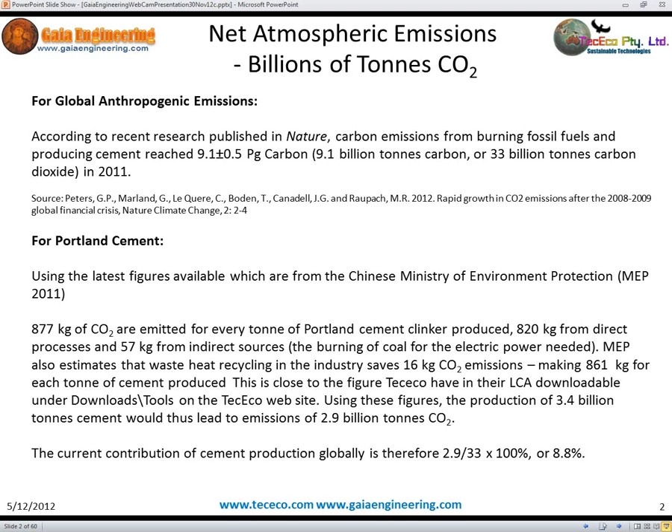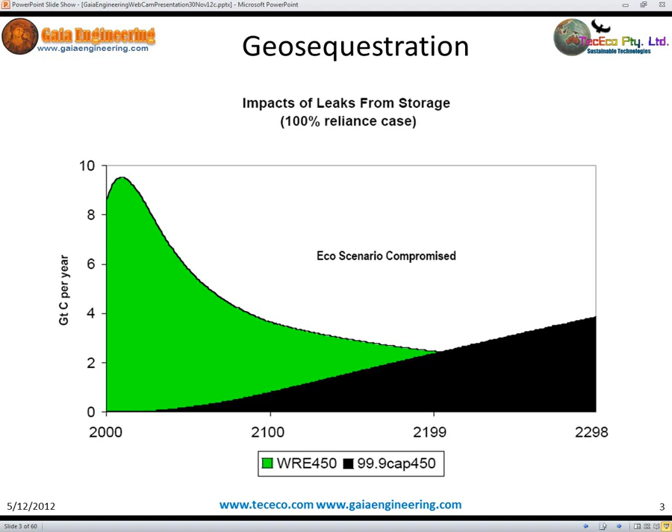Geosequestration is not going to solve the problem. There are legacy issues, and leakage will eventually catch up with it. It's downright dangerous. The Earth's crust is just not stable enough.

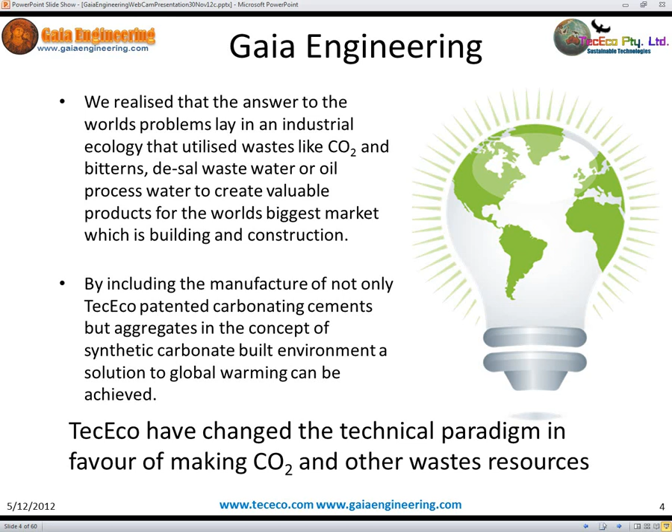I realised that the answer to the world's problems lay in an industrial ecology that utilized wastes like CO2 and bitterns, desal wastewater, or oil process water to create valuable products for the world's biggest market, which is building and construction. By including the manufacture of not only our patented carbonating cements, but aggregates in the concept of the synthetic built environment, a solution to global warming can be achieved. TecEco have changed the technical paradigm in favour of making CO2 and other waste resources.

I've been at this for a long time. In 2002, Fred Pearce, writing for New Scientist, said, "There is a way to make our city streets as green as the Amazon rainforest. All we need to do is change the way we make cement." Now, he was talking about our eco-cements, but since then I've realised that if we include synthetic carbonate aggregate and consider concrete as a whole, the sequestration potential is absolutely enormous.

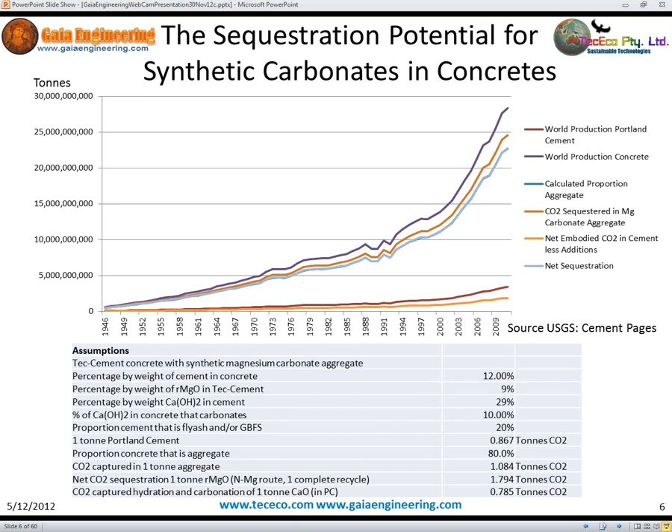Just look at the blue line on this graph. For 2011, the sequestration is potentially about 23 billion tonnes. That's about 2/3 of total anthropogenic emissions in that year.

In my opinion, a viable sequestration technology must be simple, scalable, have low upfront capital costs, low environmental impacts, produce saleable product with insatiable markets, and be easily implemented and deployable over a wide geographic area. It should also ideally be industrially symbiotic and address one or more other major problems facing the planet today.

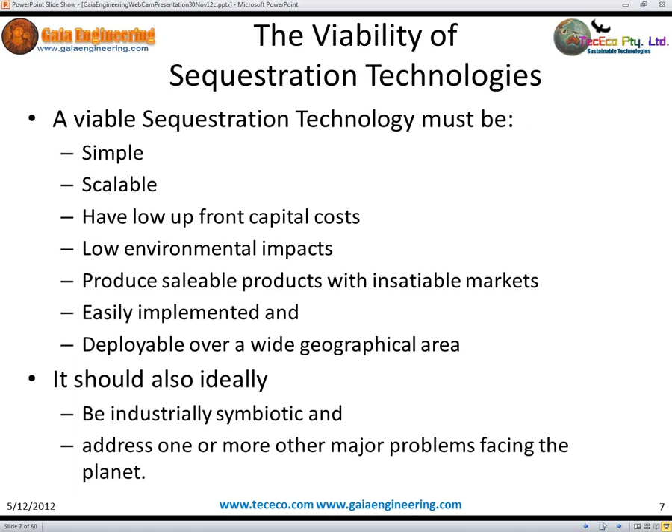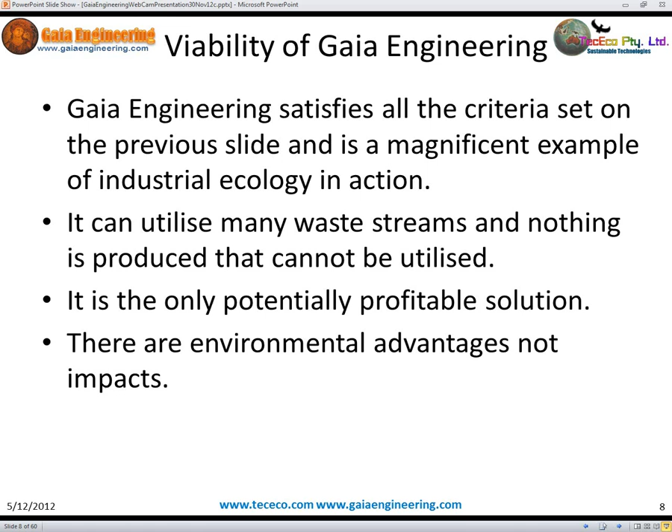Gaia Engineering satisfies all the criteria in the previous slide, and it is a magnificent example of industrial ecology in action. It can utilize many waste streams, and nothing is produced that cannot be utilized. It is the only potentially profitable solution. There are environmental advantages, not impacts. The process is scalable and can use intermittent energy from non-fossil fuel sources. It can add value using the energy available without having to store it.

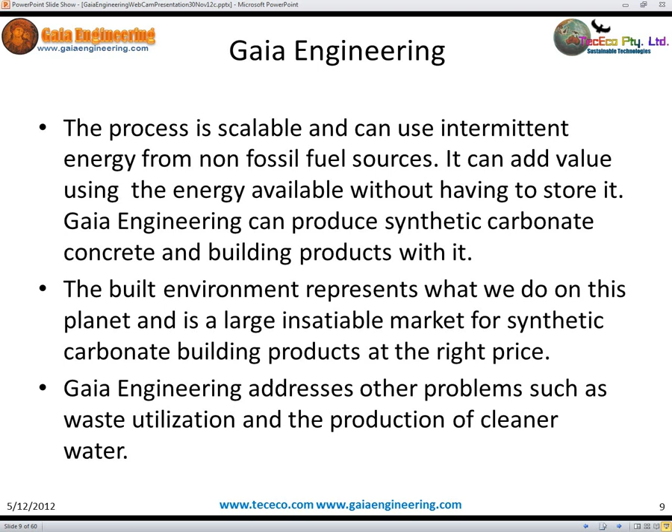Gaia Engineering can produce synthetic carbonate concrete and building products with it. The built environment represents what we do on this planet, and it is a large, insatiable market for synthetic carbonate building products at the right price. Gaia Engineering addresses other problems such as waste utilization and the production of cleaner water.

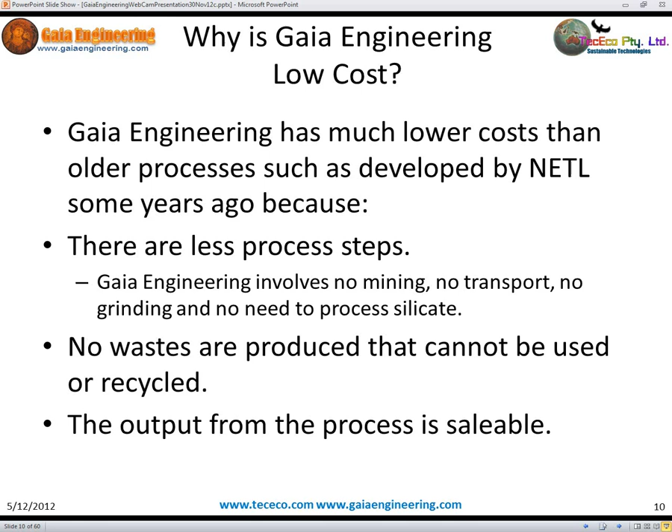Gaia Engineering has much lower costs than older processes, such as that developed by NETL some years ago, because there are fewer process steps. Gaia Engineering involves no mining, no transport, no grinding, and no need to process silicate. No wastes are produced that cannot be utilized or recycled. The output from the process is saleable.

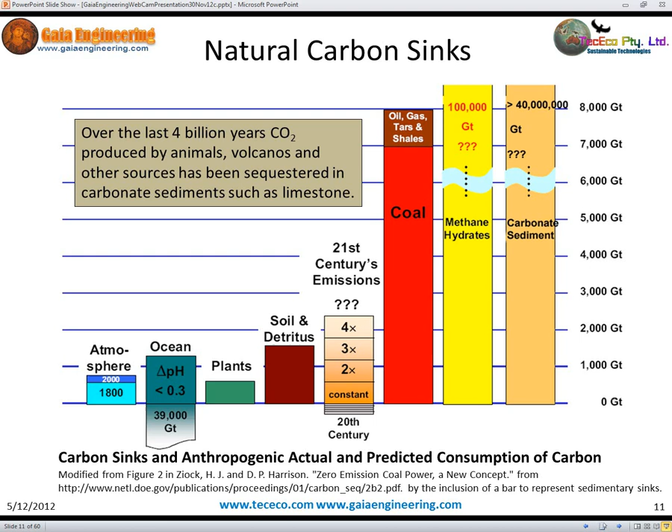Over the last 4 billion years, CO2 produced by animals, volcanoes, and other sources has been sequestered in carbonate sediments like limestone. Over 40 million gigatons. That's a lot. And it's permanent sequestration.

At 2.09% of the crust, magnesium is the 8th most abundant element. If we run out of desal wastewater and oil process water and other waste sources, we can always use seawater, because every litre contains 1.29 grams of magnesium.

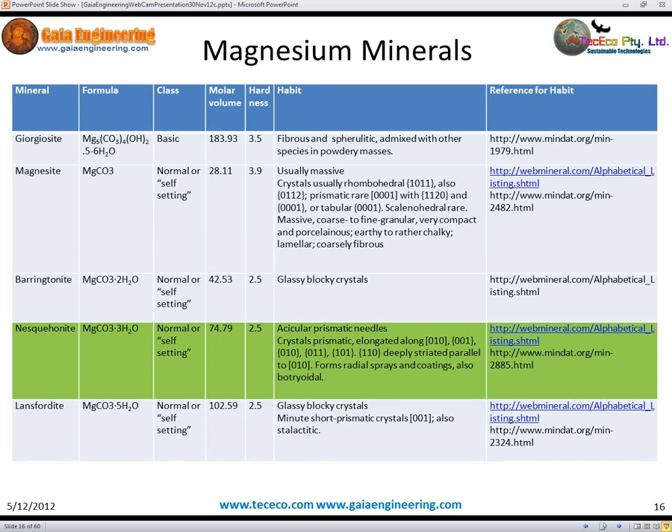There are a lot of hydrated magnesium carbonates to choose from. We're going to be utilising nesquehonite, and the reason is the microstructure. Nesquehonite has an ideal shape that contributes strength to a composite like concrete. It can be manufactured easily using our N-Mg sub-process at room temperature with little energy. It can be used directly in products such as acoustic panels, non-structural panels, insulation, etc.

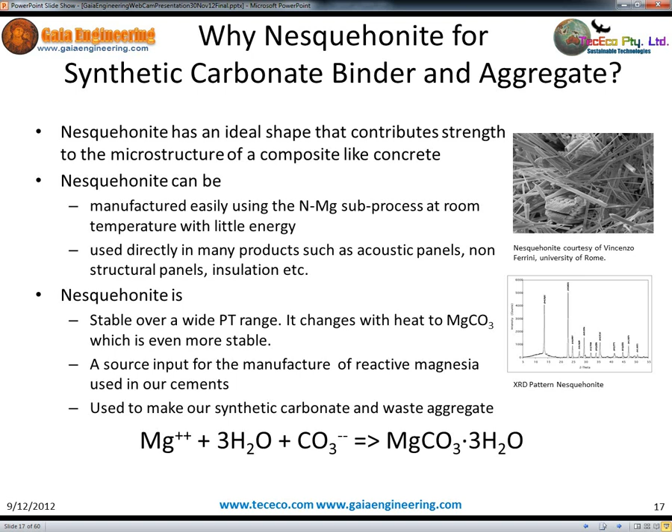Nesquehonite is stable over a wide PT range. It changes with heat to magnesite, which is even more stable. It's a source input for the manufacture of reactive magnesia used in our cements, and we also plan to use it to make our synthetic carbonate and waste aggregate.

Our colleagues at the University of Rome have a batch process for producing nesquehonite from brines. What we're doing at the moment is developing a continuous automated process. And we're also developing our Tec-Kiln, which is essential for making the magnesium oxide binder we plan to use.

There's a case for synthetic aggregate. Sand and stone aggregates are in short supply in some areas, and nesquehonite is an ideal mineral for the manufacture of reactive magnesium oxide, our binder, as well as synthetic carbonate.

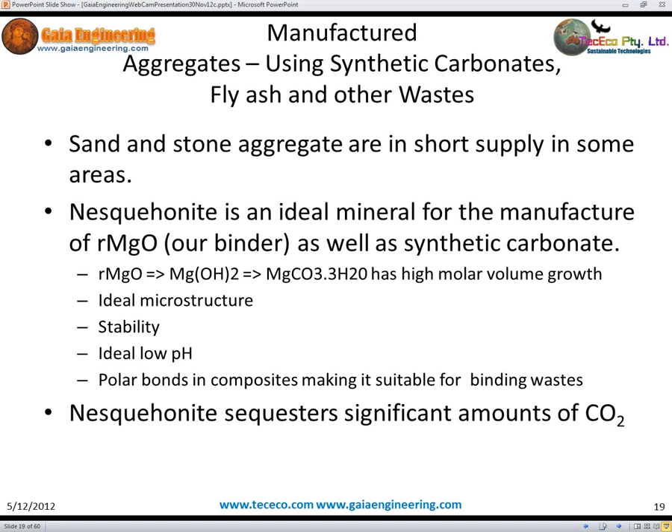Reactive magnesium oxide to magnesium hydroxide to magnesium carbonate has high molar volume growth, more for less. It has ideal microstructure. It's stable, low pH, and it creates polar bonds in composites, making it ideal for binding wastes. Most importantly, nesquehonite sequesters significant amounts of CO2.

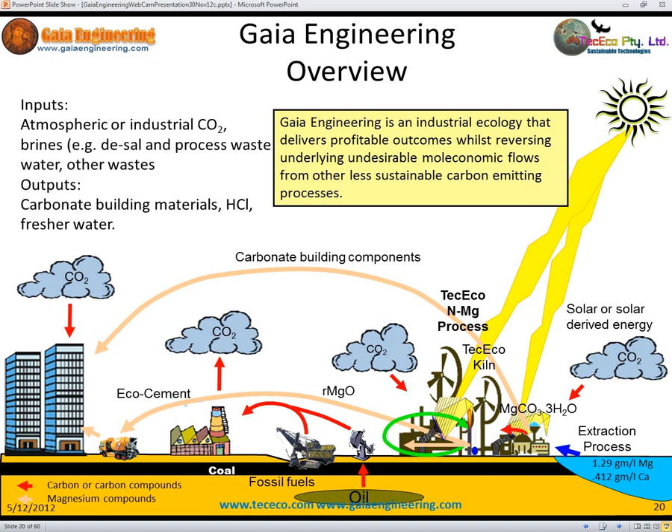This poster depicts the concept of the process. CO2 from the air combining with calcium and magnesium cations, producing the built environment. This flow diagram shows oil processed water, desal wastewater in our N-Mg process, producing magnesium carbonate for aggregate and other building components, and also as a feedstock to our kiln.

The reactive magnesia produced in the kiln makes our cements, along with a little Portland cement and perhaps some other wastes like fly ash and blast furnace slag. The process uses a considerable amount of industrial CO2.

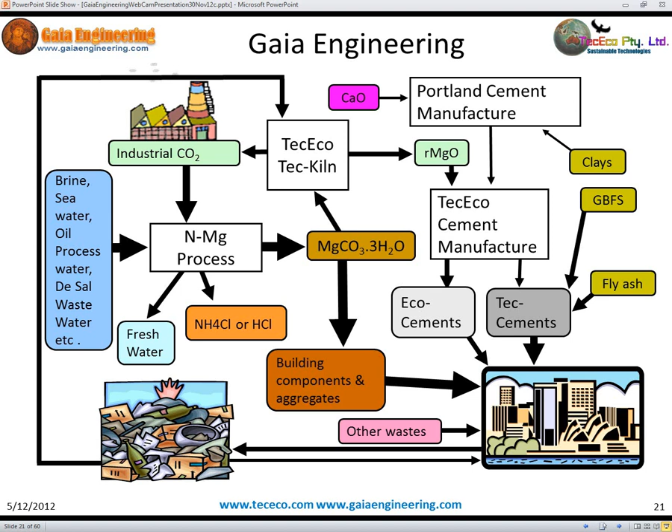The big picture is demonstrated in this vector diagram. There are sub-processes that can be included, like the Tec-Reactor process for sequestering even more CO2. There's a route to energy, but what we're going to be looking at in more detail is this circular industrial ecology here. The N-Mg process produces nesquehonite for our synthetic carbonate aggregates and other components. It's also a feedstock to our kiln to produce magnesium oxide used in our cements.

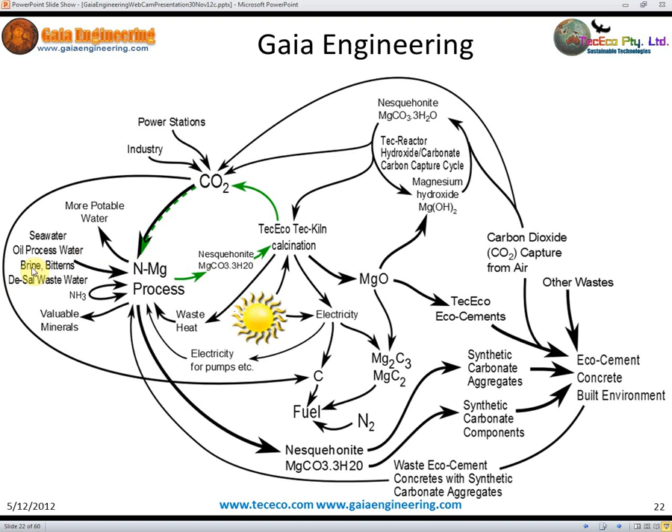The emissions, along with other point source emissions, go back into the process, combined with an alkali metal cation, in our case magnesium, to produce more nesquehonite. Consider the thermodynamic cycles involved. At the moment, our eco-cements cannot be made with capture, and so even though they sequester the chemical release during manufacture, there are some emissions associated with the process energies.

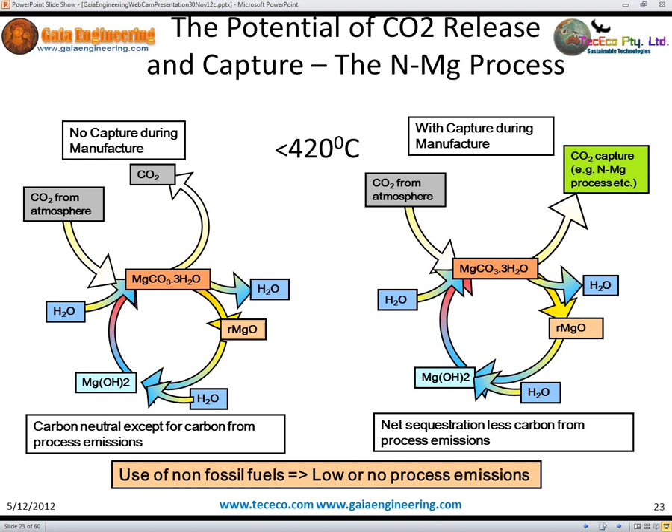The N-Mg process has capture during manufacture. It uses a man-made nesquehonite input in which there's capture, and there's capture during setting. That's 3 stages of capture. The sequestration potential is enormous. It's shown in this diagram. Stage 1, the N-Mg process. Stage 2, the TecEco kiln, calcination. Stage 3, our eco-cements bonding together synthetic carbonate aggregates to create carbonate concrete.

In stage 1, the production of nesquehonite, the sequestration is 1.084 kilograms of CO2 per kilogram of nesquehonite produced. The kiln has net emissions of 0.382 kilograms of CO2 per kilogram of magnesium oxide produced, and in the reabsorption of CO2 by our cements, the stoichiometric amount of sequestration occurs at 1.092 kilograms of CO2 per kilogram of magnesium oxide. In total, that's about 1.75 kilograms of CO2e per kilogram of magnesium eco-cement.

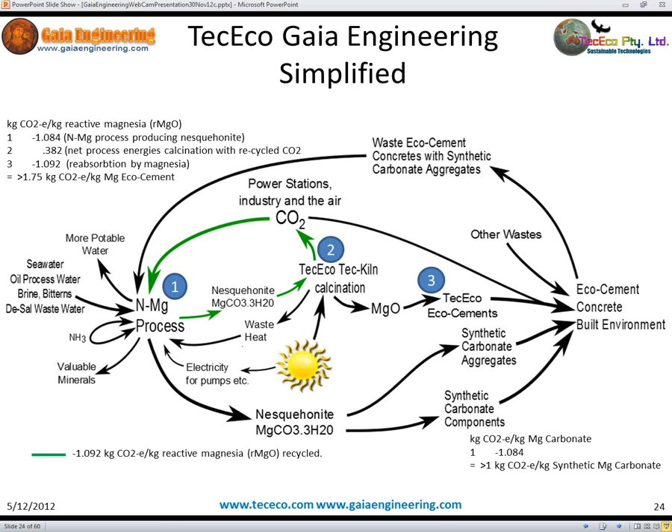The production of synthetic carbonate aggregates using nesquehonite only involves step 1, so we're looking at 1.084 kilograms of CO2 per kilogram of synthetic magnesium carbonate. Very like the Solvay process, it occurs rapidly at a relatively low pH. The reactions you can look at later, but importantly ammonia is recycled in the process. Ammonia is our pH adjuster.

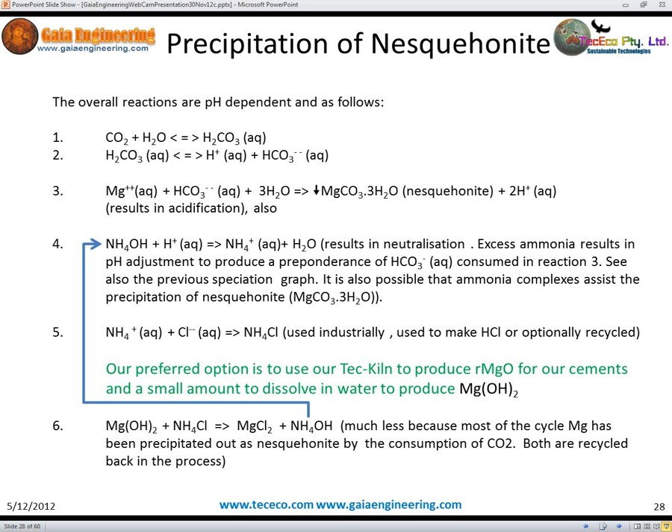Our new Tec-Kiln is an important part of Gaia Engineering. It will operate in a closed system and therefore will not release CO2 to the atmosphere. Instead, it will be recycled to the N-Mg process. The kiln can be powered by various, potentially cheaper, non-fossil fuel sources of energy, such as intermittent solar or wind energy, and it's energy smart. It can be powered up or down depending on the energy available.

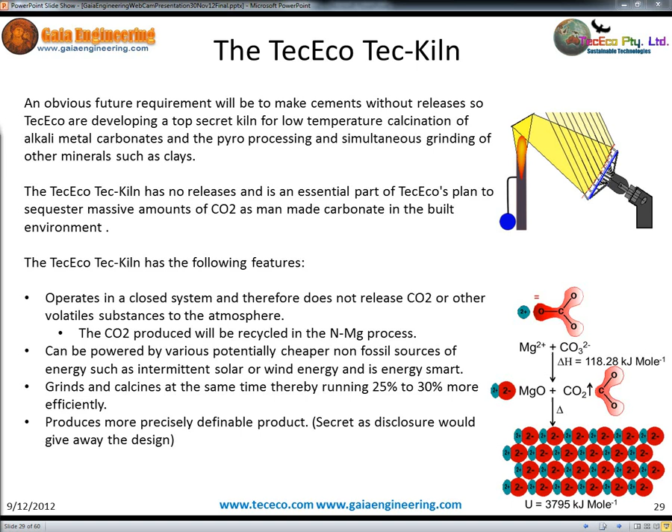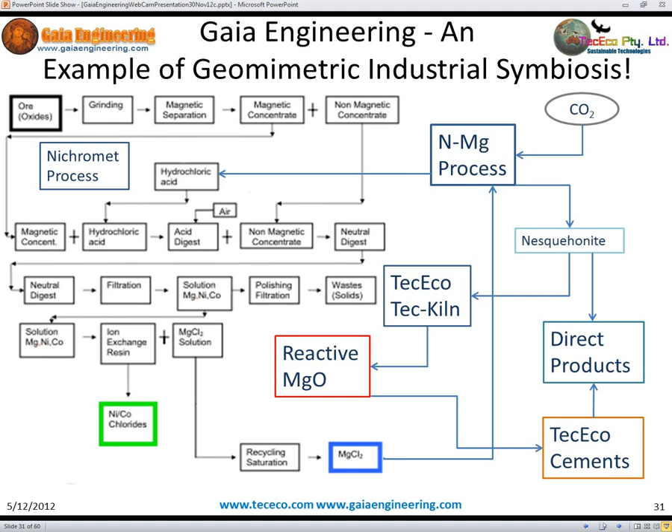It will grind and calcine at the same time, and therefore run 25 to 30% more efficiently, and it will produce more precisely defined product. It operates at relatively low temperatures, lending it to the use of solar power directly or waste energy. Gaia Engineering is an example of a geomimetic industrial symbiosis. In this diagram it's shown interfacing with the Nichromet process, in which nickel and cobalt are produced from lateritic ores.

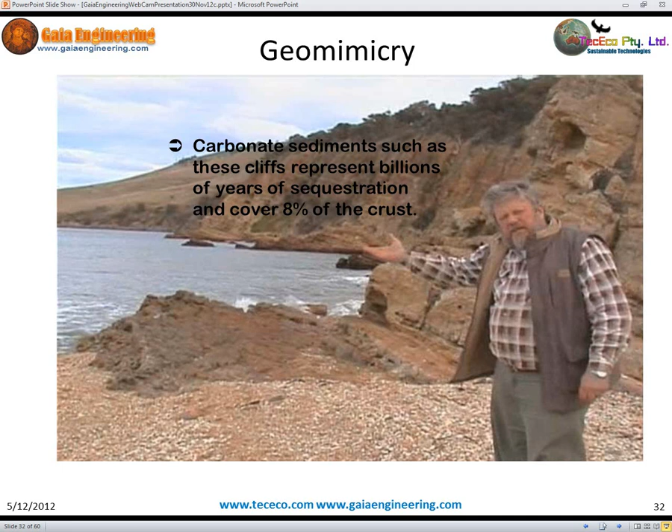These cliffs behind me are made of limestone. Limestone and other carbonates represent about 8% of the crust. Every litre of seawater contains 1.2 to 3 grams of magnesium and about 0.4 grams of calcium. That's enough to last basically forever.

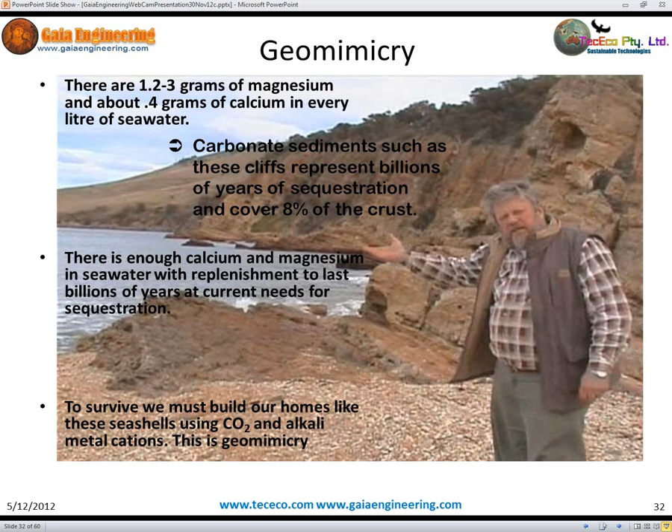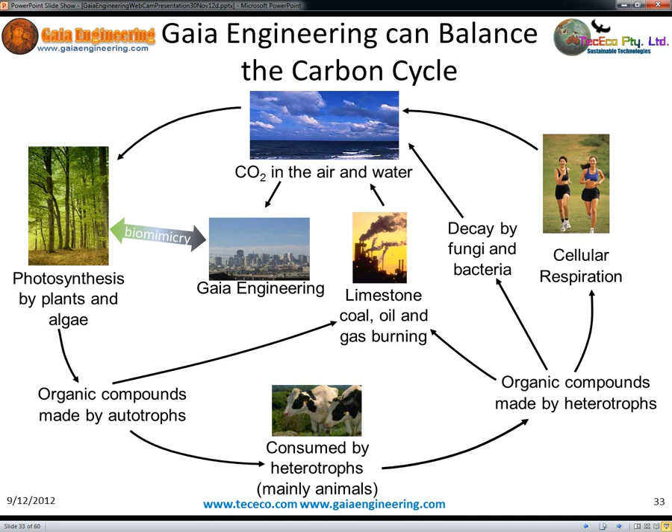What we need to do to survive is build our homes like these seashells using CO2 and alkali metal cations. This is geomimicry. Gaia Engineering can balance the carbon cycle. We need to biomimic plants and algae by building our cities so they absorb CO2. In this way, we can survive the future.

My company TecEco at this point in time has patents granted and patents pending. We've managed to survive what in Moore's innovation curve is referred to as the chasm. We're now looking to develop our technology.